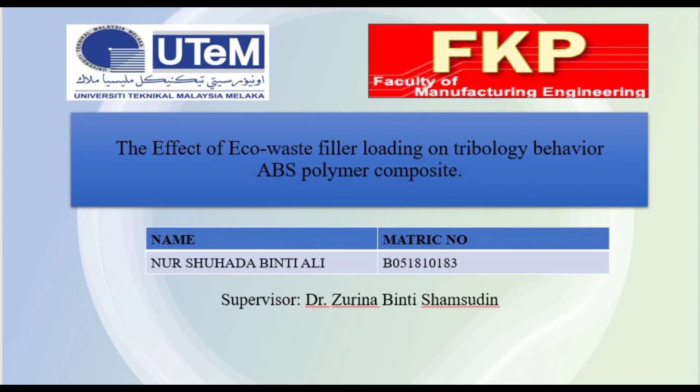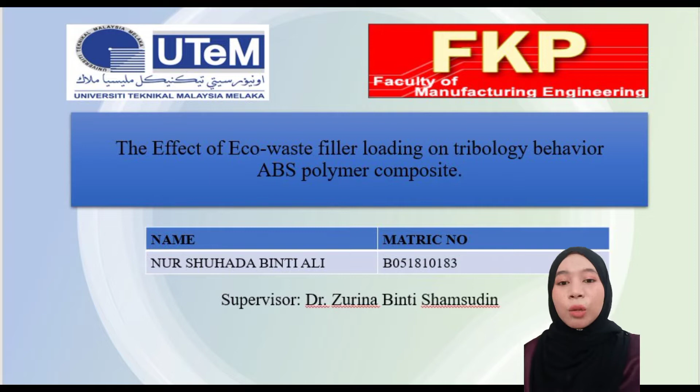B051810183. I will present my final year project, titled 'The Effect of Eco-Waste Filler Loading on Tribology Behavior of ABS Polymer Composite,' supervised by Dr. Zurina binti Shamsudin. Nowadays, composite materials are used in many applications where lightweight, high specific modulus and strength are the critical issues.

A composite material is a combination of two materials with different physical and chemical properties. The matrix material selected in this project is ABS. What is ABS?

Acrylonitrile-butadiene-styrene (ABS) is one of the engineering thermoplastic polymers widely used over the past decade, finding application in many fields like automotive, aerospace, marine, business machines, computers, and telephones.

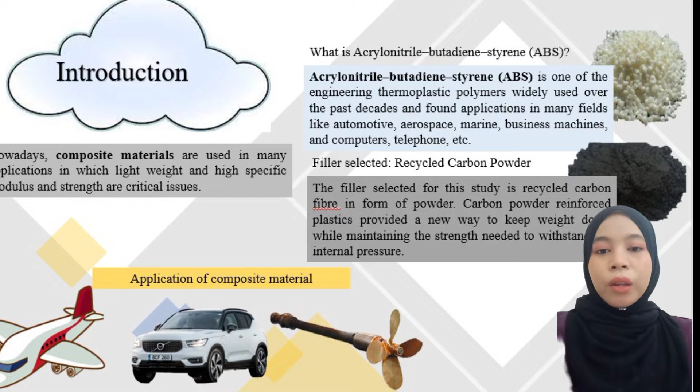The filler selected is recycled carbon powder. Carbon powder reinforced plastic provides a new way to keep weight down while maintaining the strength needed to withstand internal pressure. What is the problem statement for the project?

The first problem is that the element of recycled carbon particles from trimming waste, an industry waste used as filler phase, is undefined. The second problem is the suitable composition to produce RCP-ABS composite material, in terms of matrix and filler, based on the speed, loads of friction test for tribological characteristics and wear track.

Moving to the objectives. First is to characterize the recycled carbon particles' physical properties using a particle analyzer, X-ray diffraction, and scanning electron microscopy. The second objective is to evaluate the effect of different filler loading on the tribological characteristics, which are coefficient of friction and wear weight loss, using pin-on-disc testing.

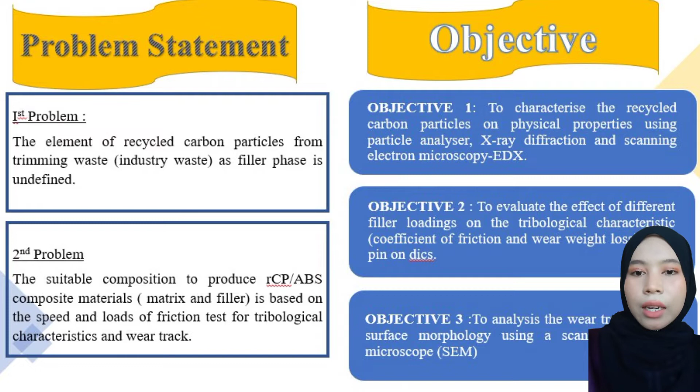Lastly, to analyze the wear track on the surface morphology using a scanning electron microscope (SEM).

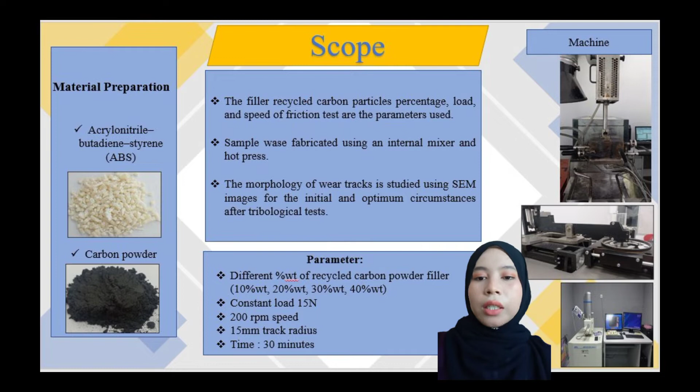This part shows the scope of the project, where I carry out the compounding process of ABS polymer with recycled carbon powder, analyze the tribological properties of each composite sample through pin-on-disc testing, and observe the wear track surface morphology using scanning electron microscope (SEM).

This is the literature review of previous research.

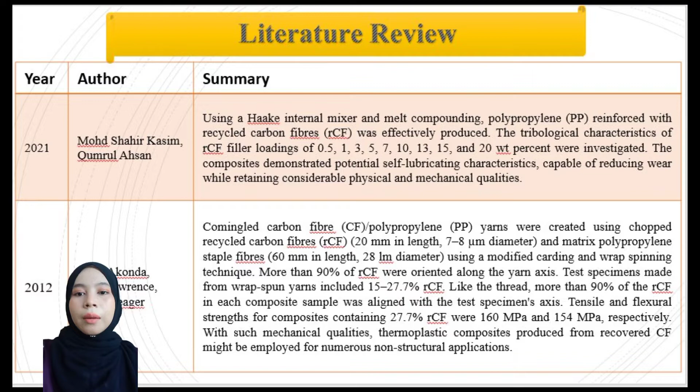This part covers all the methods and processes used to perform this project. The methodology shows the flow of the project and the process, where the critical part is the preparation of the sample, testing, and analysis of the tribological characteristics of the composite sample.

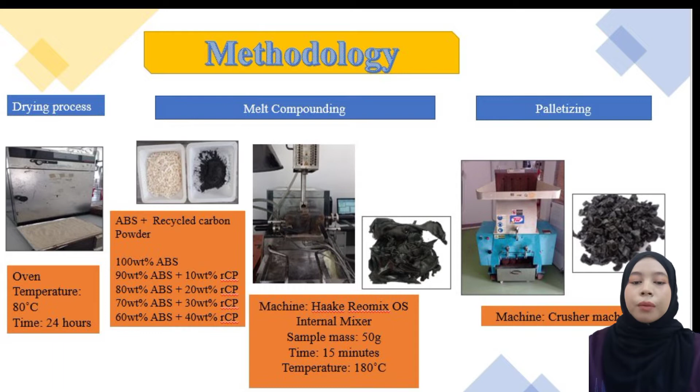The raw materials involved in this project are ABS as the matrix and recycled carbon powder as the reinforcement. The formulation of carbon powder consists of 5 formulations as shown in the orange box. The process starts with calculating the weight percent of each material and determining the amount needed for each sample based on the mole in grams.

The ABS is dried first using an oven at a temperature of 80 degrees Celsius for 24 hours. Next, the raw materials were mixed using an internal mixer for 15 minutes each sample. After that, the mixed material was crushed into granule size using a crusher machine.

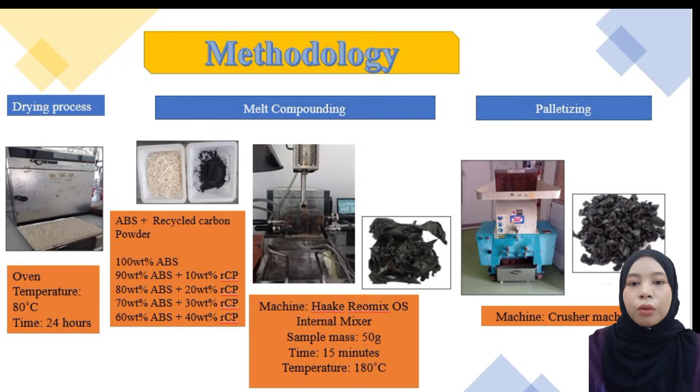The shape of the mold is rectangular. The geometry of the sample is 100 mm width, 150 mm length, and 3 mm thickness. The testing was carried out at a sliding velocity of 200 rotations per minute, at a constant load of 15 Newton and a constant sliding distance of 2.261 km.

After the test, the sample was coated with platinum and the worn surface was observed under an EVO 50 scanning electron microscope (SEM) to view the microstructures.

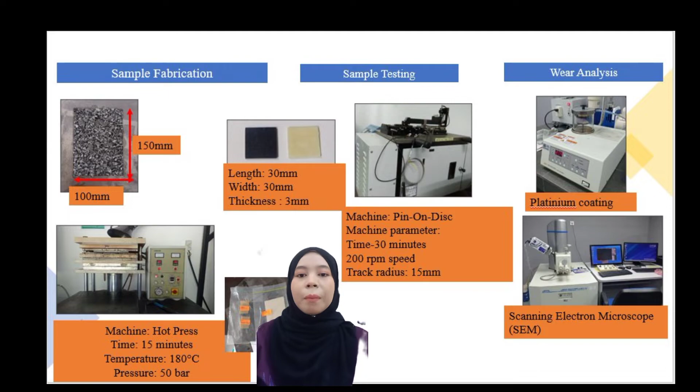The graph shows the recycled carbon particle size distribution. The ranging size of the recycled carbon powder particles is from 11.8 to 15.16 micrometers. Measurement of the size distribution of recycled carbon fiber is necessary for determining the performance of reinforcement when incorporated into a new matrix.

The SEM images obtained show the fiber to have a cylindrical shape, and therefore the micrographs were used to determine the diameter of the fiber. The diameter of the recycled carbon is about 7 micrometers.

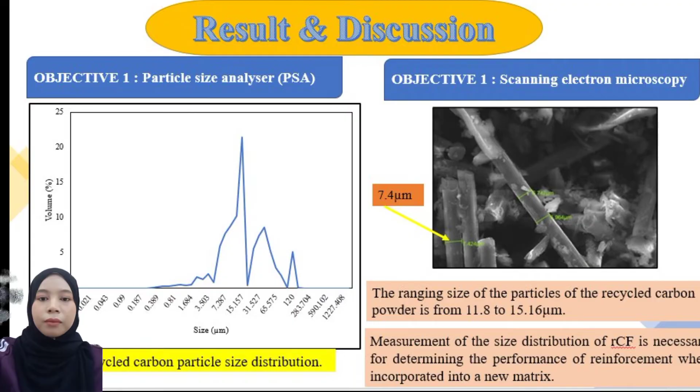Next, we go to the energy dispersive X-ray (EDX). SEM integrated with an EDX analysis system was used to obtain the average weight of material deposition. Figure A shows the scanning part of the material. Figure B is the EDX analysis, and figure C is the weight of the material deposition. As we can see, there are 4 elements, which are carbon, oxygen, silicon, and sulfur, that appear in the powder.

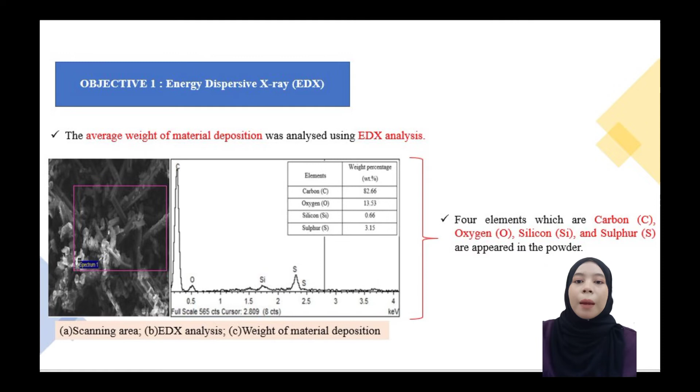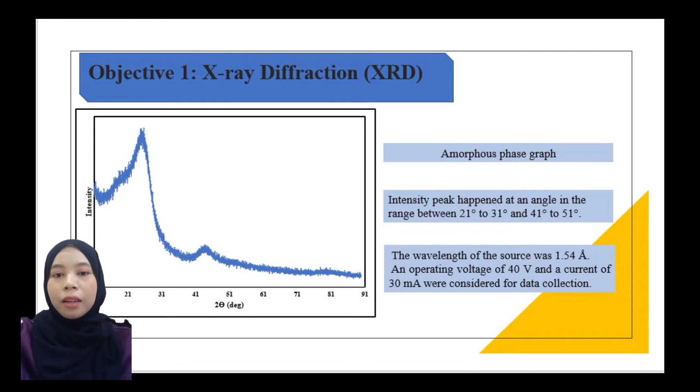To fulfill objective one is X-ray diffraction (XRD). The XRD method was used to evaluate the surface chemistry of the recycled carbon powder. The graph shows that the amorphous phase of recycled carbon powder intensity peak happened at angles in the range between 21 degrees to 31 degrees and 41 degrees to 51 degrees. The wavelength of the source was 1.54 angstrom, and an operating voltage of 40 volt and current of 30 milliampere were considered for data collection.

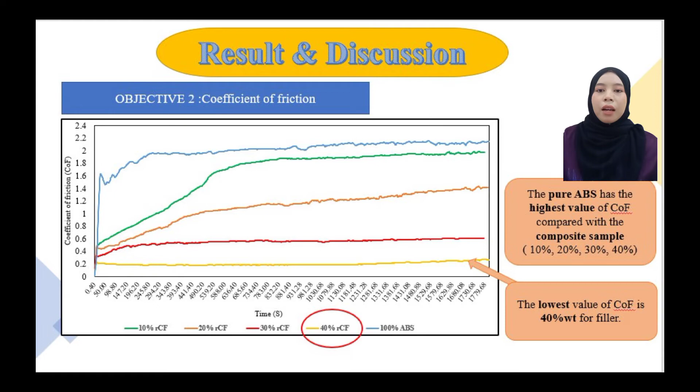The graph shows the coefficient of friction of the composite sample against the time, which is 30 minutes or 1800 seconds, under 15 Newton workload and 15 millimeter track radius for the rotary experiment using pin on disc. The pure ABS has the higher value of coefficient of friction, in the range of 2.10 to 2.15, compared with other composite samples. This might be due to the rough surface of the sample. The lowest value of coefficient of friction is at 40% recycled carbon powder filler loading.

Next, we go to the result of wear weight loss, which is the second objective of this project. The graph shows the average wear weight loss due to the wear on the ABS polymer composite. According to Surya and Parasanti 2022, the wear effect was determined through morphological observation of the surface and debris that had been eroded away. Sliding distance and load are the two most influential factors that control wear. During the tribological test, a greater amount of wear weight loss was due to the increased friction caused by the higher coefficient of friction value. And the lowest value of wear weight loss is 30% of recycled carbon powder. This weight loss is included in the second objective.

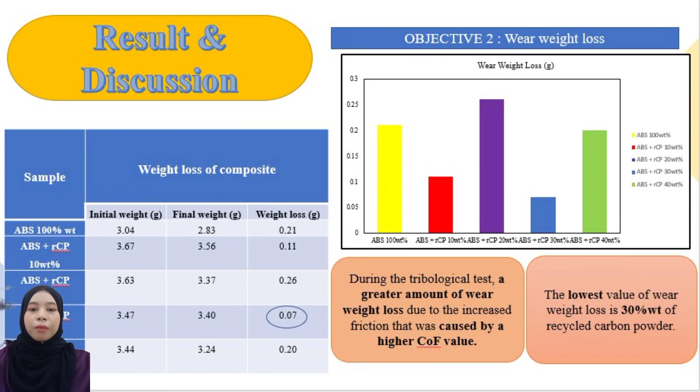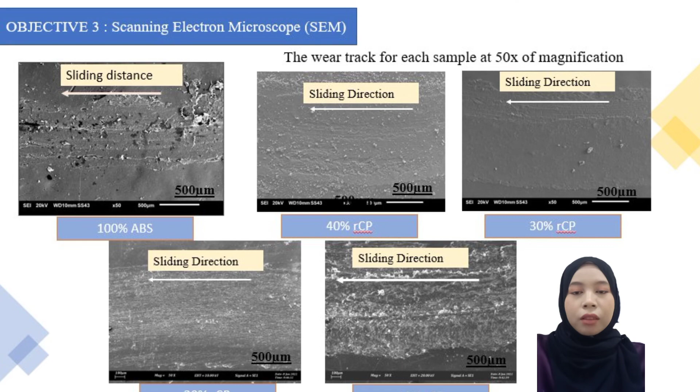For the third objective is scanning electron microscope. The figure shows the wear track for each sample of ABS reinforced RCP at 50 magnification. As we can see, the grooves run across the surface of the worn pin parallel to the sliding direction. This is caused by hard asperities on the counterface which dig into and remove material, resulting in micromachining, wear groove tearing, scratching, and surface cracking.

In conclusion, the recycled carbon particle has a mean particle size of 15 micrometer, and it was found the amorphous phase was present due to the epoxy residue still present on the recycled carbon particle. This project presents the effect of recycled carbon particle loading of 10%, 20%, 30%, and 40% on the tribological properties, which are coefficient of friction, wear weight loss, wear, and surface morphology. The lowest coefficient of friction is at 40% content of recycled carbon filler, and the lowest value of wear weight loss is at 30% of recycled carbon particles. So in general, the wear track of 30% content of recycled carbon powder is the best because the wear track is shown smoother than other fillers.